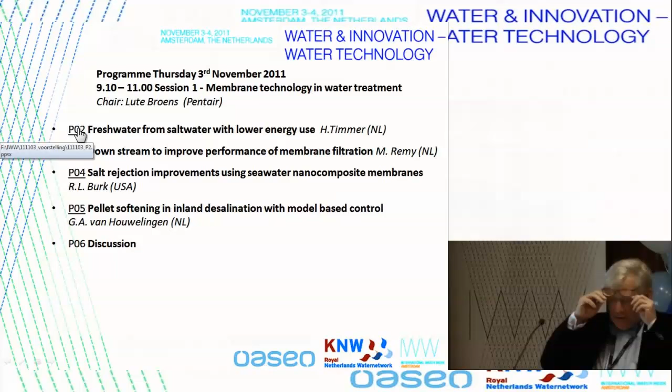Thank you very much, Peter. First of all, I have changed glasses.

Welcome here in this room on water and innovation. You are in the Netherlands in a very innovative environment when it comes to water technology and innovation. And we are talking about membranes this morning. And we all know membranes obey the rules of process intensification. On a small footprint you can do a lot of separation technology. I am myself very fond of membranes.

I'm one of the co-founders of the famous X-Flow company, recently acquired by Pentair from the old Norit. There was a time that the Netherlands had the highest membrane density per capita, but then we sold a huge plant, some 16,000 cubic meters per hour in Kuwait, and the Kuwaitis are still at the top of the bill.

We have, I think, a very nice program on membranes. Mind you that we have a setting in this country that we do a lot of research on membrane technology. For instance, the top institute, Wetsus, in the north of the Netherlands. So this was my short introduction.

And now I would like to give the floor to the first speaker, that is H. Timmer. Harry works with Oasen, and I forgot to tell that also our water companies, the potable water companies and the wastewater companies, are very innovative and embrace membrane technology all over the place. Harry, your title is Freshwater from Saltwater using less energy, and I'm very curious to hear about it. Please come forward.

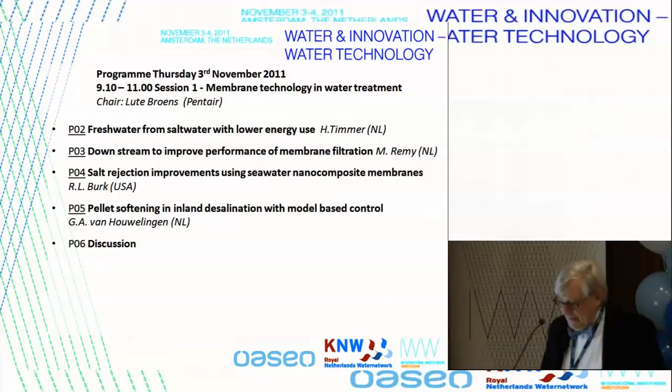Okay, thank you, Lute. Welcome at this early hour. The presentation is, as I said, fresh water from salt water with lower energy consumption. And I think it's a very innovative technique, and I'll present it to you today.

This is our supply area. We're the water supply company in the western part of Holland. What you see on the picture is that our well fields are located very close to the River Rhine. So what we do is we abstract river water after riverbank filtration, and this water is free from pathogens and most micropollutants, and then we have a purification of our own.

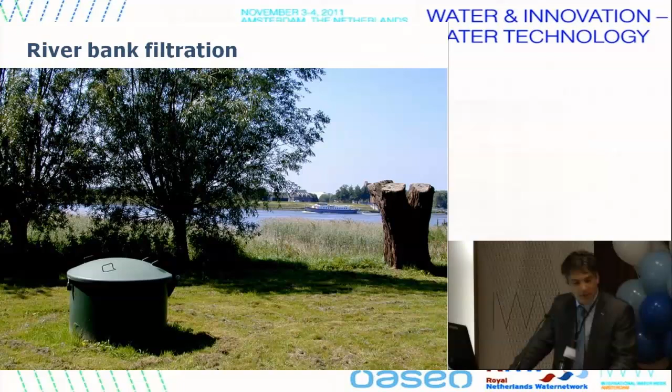So what we see is that in front of our well fields, in the river, sometimes the chloride concentration is as high as 1,000 milligrams per liter. That's not too long, so it's 1 week, 2 weeks, 3 weeks. But, well, it affects our water quality.

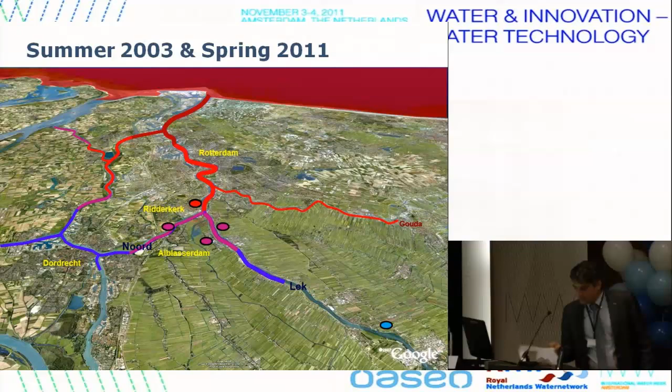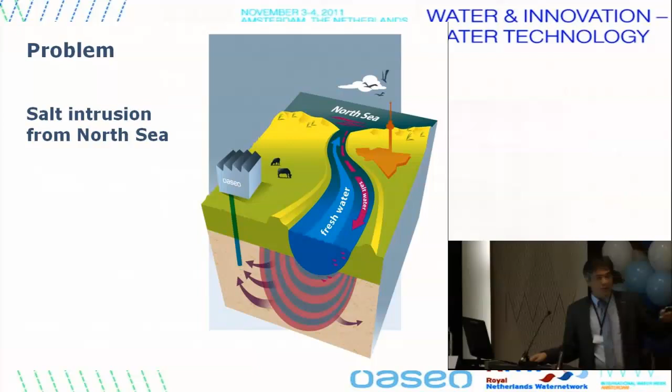This illustration gives again what happens. Once in a while, salt water intrudes here and infiltrates in the river, and it's pumped up as a mixture at our well fields. That would not be a problem.

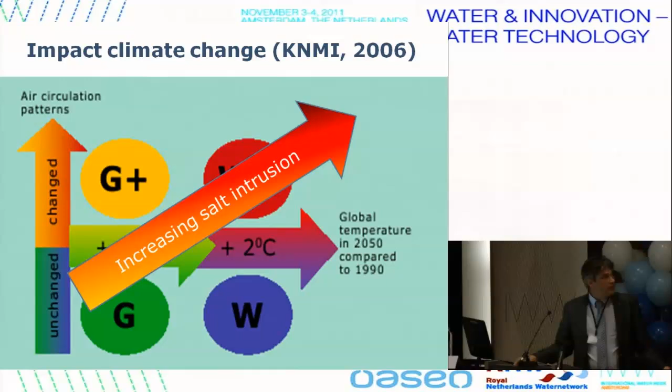As Jan-Peter said, we're living in a changing world, and there's climate change going on. And what we see, which is calculated by the Royal Dutch Meteorological Institute, is that there are 4 specific climate scenarios, and if we calculate the effect of these scenarios on the weather and on the sea level, then we find that in the future sea level will rise, the discharge of the River Rhine will diminish in summer, and that will have effect on our well fields.

Because you will have more and more often salt intrusion from the North Sea, we calculated the effect of these 4 scenarios on our well fields. These well fields are here. These are the 4 scenarios, 1, 2, 3, 4. We see that in some of these scenarios, the concentration of salt in our well fields will be higher than the standards that are set by the Dutch government. So we have a problem.

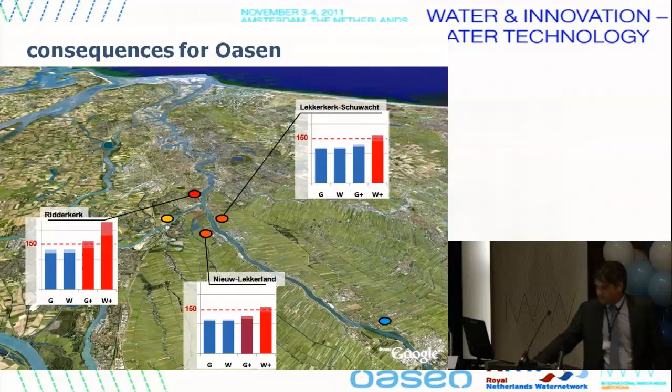The removal of salt is not so very, well, there are solutions for it. For example, at a plant at Ridderkerk, we have this solution. What you see is a cross-section of the underground at Ridderkerk, where we have salt water deep down, fresh water on top, where we normally abstract the water.

And what we have is an upconing of salt water to our well fields. So we installed 1 or 2 wells which abstract this brackish water. We put it through a membrane, and then we have drinking water. And if you blend it, 80% conventional treated water with 20% membrane water, well, we'll have a good solution. But there are several

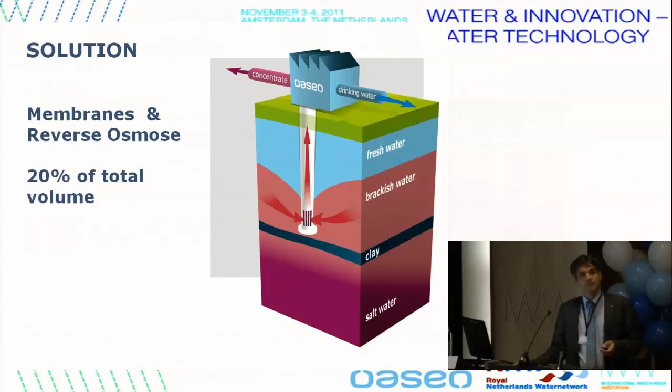There are some benefits and challenges about RO, membrane filtration. The benefits are like the removal of salt. We have this collateral profit, the removal of hardness and nutrients and micropollutants. In the case of a deep well abstracting brackish water, we have also the freshkeeper concept, which I will show later on. There are some challenges, and these are the costs.

The membrane filtration is more expensive than conventional treatment, and even more problematic is the brine. As a water supply company, we have a lot of water to produce. So we produce about 20 or 30% brine or concentrate. That's an enormous amount of volume of concentrate, and we have to dispose this concentrate.

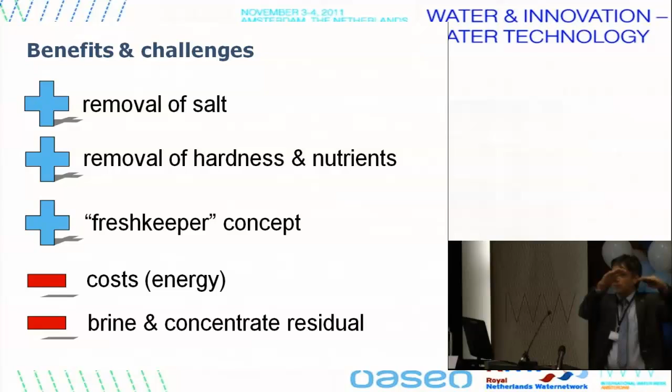And because of the effect on the environment and the Water Framework Directive, we need permits and a license to get rid of this brine, and that's not easy because it's a large volume. Another problem is that we cannot afford, as a water supply company, to throw away 30% of our production, because we have to deliver 40 million cubic meters a year to the customers, and we have a license to abstract about 50 million, so there's not 30% over.

When we talked about this problem with our colleagues at the Technical University Delft, Dr. Bas Heijman said, well, I have this idea, and you might like it. He said, what if you build into a well, inline, a membrane unit, at about 70 meters depth, and you use the hydrostatic pressure that's there from the water. At 70 meters, it's 7 bar.

It's enough to have a 50% recovery, and you only abstract the permeate, 50%, and the concentrate you can push away with a little extra pressure in the deep aquifer where it's salt anyway, and then you have double concentrated groundwater injected deep in the underground. That will save energy, and you don't have any problems with the brine anymore.

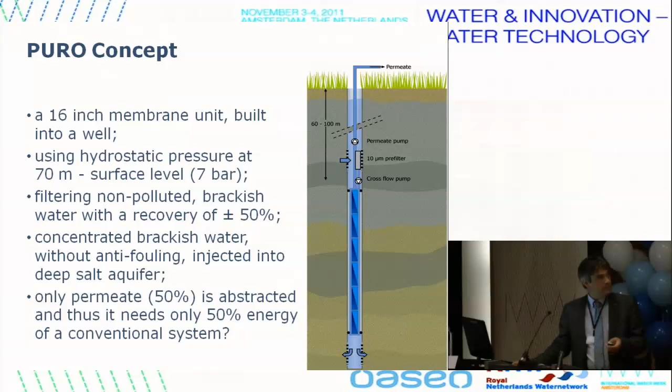We like this idea very much, so we adopted the idea. We said, okay, we'll try to transform this idea to a realistic project. So we had some partners, the Logisticon Water Treatment Company, the Technical University Delft, a drilling company, our water supply company, and Waternet. And we said, well, let's do this. And because it has some innovative concepts in it, we said, okay, we'll try to find some funding.

So we found funding with agentschap.nl, which is the Dutch government, and the province of South Holland, who also pays some of the costs. And of course, the project partners pay the most.

Well, the same amount of the same pluses. The costs and the concentrates are taken care of, so we only have pluses. And the concept is depicted here. You abstract the brackish water, the drinking water is coming up, and the concentrate is pushed away deep down.

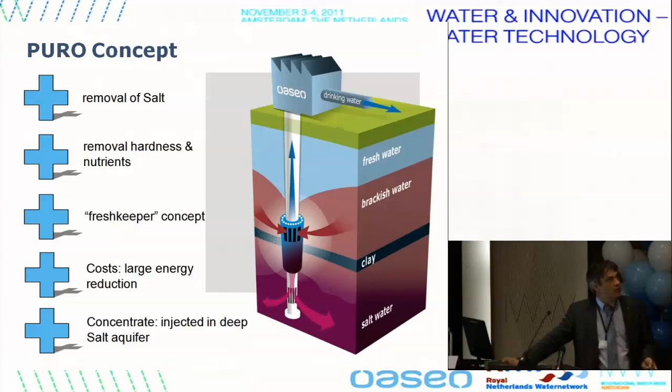Now we have Waternet, who takes this idea further, because Waternet is also responsible for the water quality in the polder areas in the Netherlands. And this is a typical cross-section of a polder area in the Netherlands, and what we see is that in the deeper polders there's an upward seepage of salt water, and this seepage of salt water affects the agricultural use of this polder and the ecological value of this polder. So that's a problem.

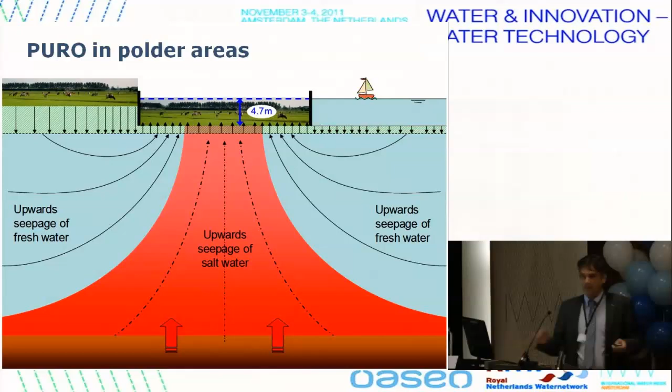If we abstract about 10-20% of the salt water, and we make, let's say, drinking water, then we don't only have drinking water, but we also have only fresh water seeping upwards, and then we have a great quality change and a better agricultural use and a better ecological use of this polder area. This is why Waternet is very interested in this concept.

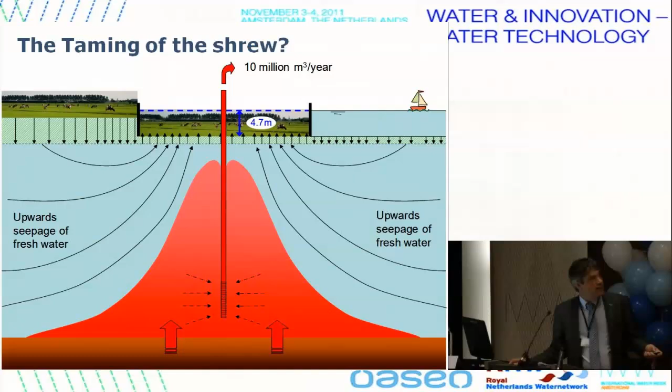What do we intend to do? The next months we'll work on the detailed design of this well. You will understand that it's possible to make this well, but we'd like to make it as maintenance friendly as possible, because we don't want to remove all the RO membranes every 2 months or so. Once a year, we'd like to do maintenance on this system.

We're working hard on the permits. There are about 5 parties, like the municipality and the province and the Dutch ministry, where we have to have a permit for this system. I think we'll have the installation working in about the summer of next year, and then we'll start the pilots. And I hope in 2 or 3 years we'll have conclusions. It's important to mention that next to this practical side, we have 2 PhD students working on the research.

Well, and what are the research questions that we have? One is, these are practical. Logisticon and Oasen will solve these, I hope. And these are the research questions which are taken by the Technical University. Jeroen Postumus is working on: will the concentrate precipitate into the membrane, or will it precipitate into the discharge filter deep down? Where will the brine go is where F. Smits of Waternet is doing the research on.

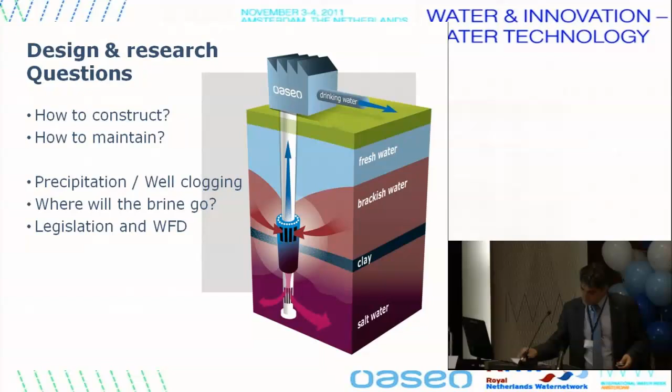And we are very interested in this regulation and the Water Framework Directive, because as a water supply company we'd like to do this on a large scale, but we'd like to do it within the framework of the laws. One of the first results of F. Smits and Waternet is this simulation.

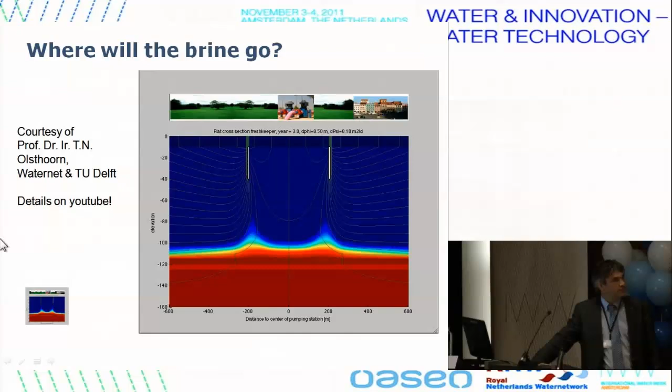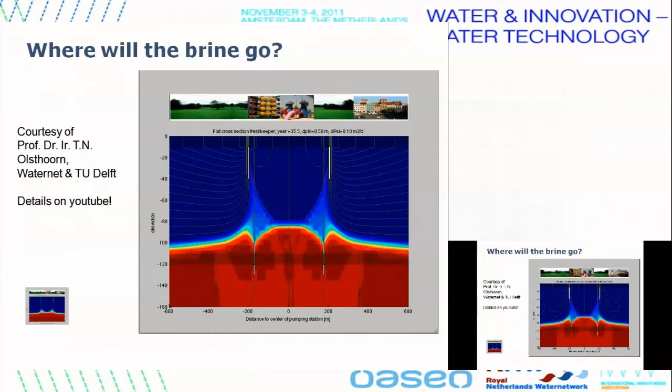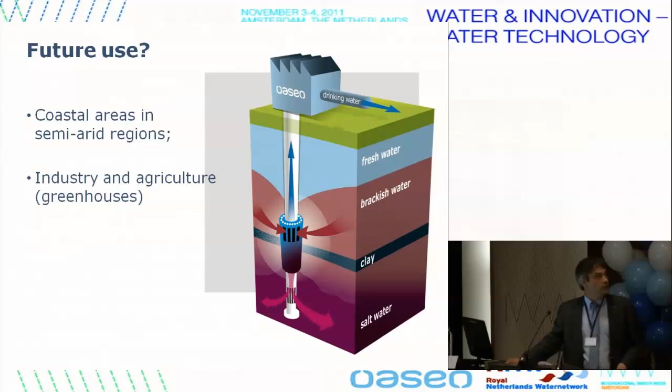What will we do next? What will be the future use? If it is a success, I think it can be used in coastal areas in semi-arid regions, but also in our countries. It might be interesting for industries and agriculture. Well, this is the last slide. There's one more. Thank you for your attention.

Okay. Thank you, Harry. You did very well, dead on time, and we saw indeed again an example of a very innovative collaboration in the Netherlands. Water companies, technological companies together.